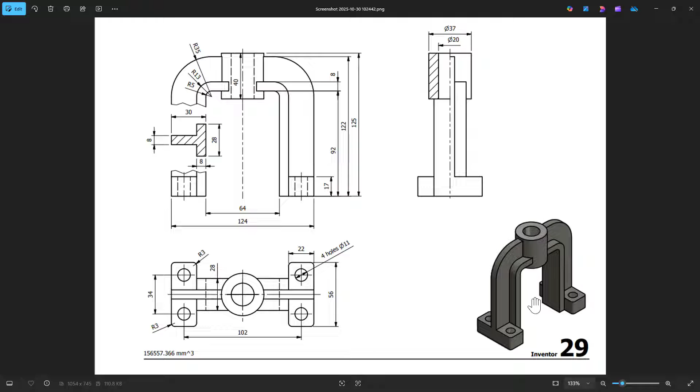Looking at this model here, it's a very simple model using some extrude bases, some cylinder cuts, and even being able to use a shell feature that we have, and then we'll be able to mirror over some of the parts as well. So we'll get started.

So looking at this model, we'll be in millimeters. Make sure we double check that we're in millimeters. We will move to the shapes. We'll pull out an extrude block. We'll go to the front face and bring this out to be 124 millimeters. The total height will be 122 millimeters.

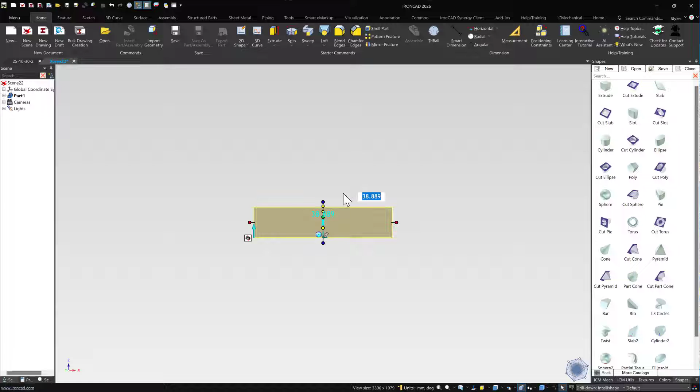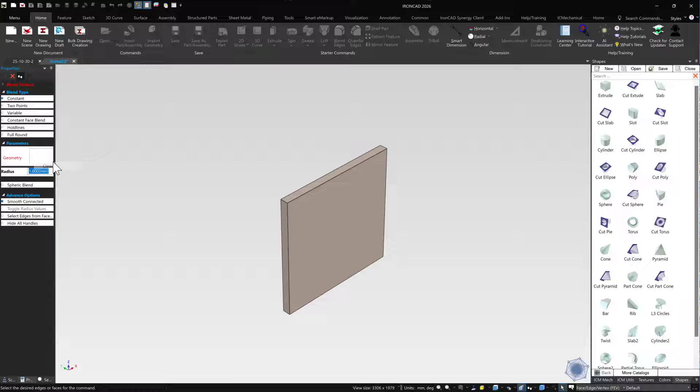Looking at the thickness for this middle part, the middle part will have a thickness of 8 millimeters. We'll go to blend, and blend the corners. Clear. We'll blend these corners here. These will have a radius of 35. Go to this radius here. Click OK. So this will give us the middle shape.

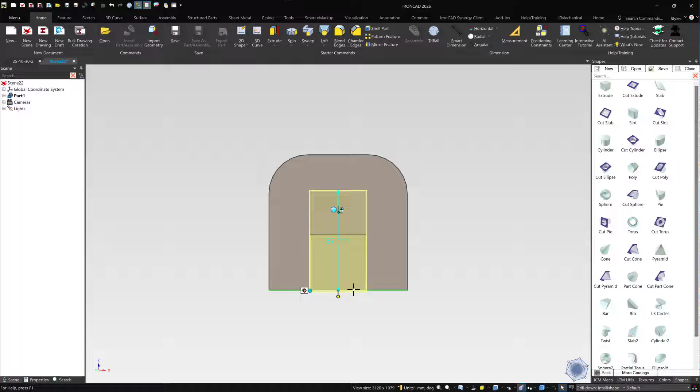Next, we'll go back to add another extrude base, one here in the middle. We'll bring this down to the bottom. We'll have this go to the right side. Bring this out here, bring this out here. We'll just remove perspective view.

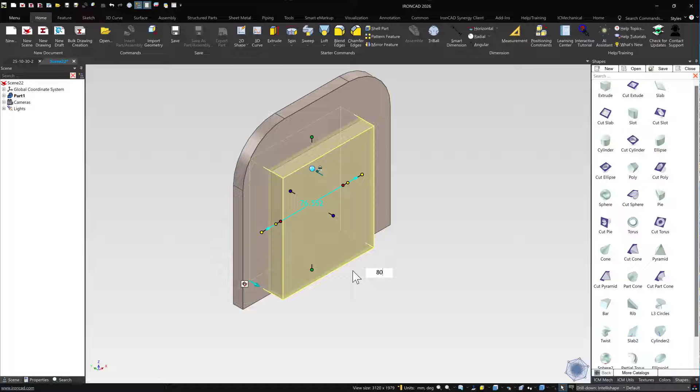Then what we'll do is bring this out to the total thickness. This has a total thickness of 28. We'll bring it out to the thickness of this side. So this has a total thickness of 64, but a thickness of 8 on each side, so this 64 being the middle. So this will have a total width of 80.

And the total height of this, so the total height at the bottom of the shell, if we were to bring this back, at the bottom of the shell is 92, but with the thickness this has a total of 100. So we'll bring this up to 100. Let's do it like this. 100. We'll go back to the blend.

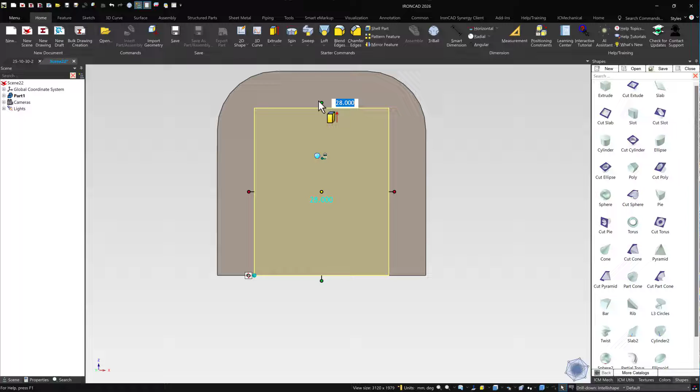And we'll blend this section here. This has a total thickness of 13 on the outside. 13 here, 13 there, here, and here. So we'll add this, 13, click OK. So we now have this section here.

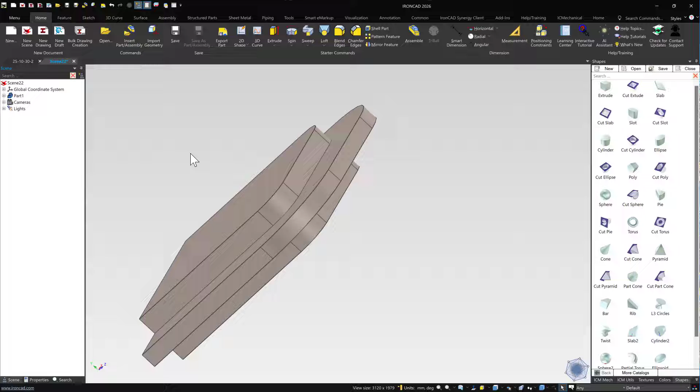So what we'll do now is go to shell part, click on this surface, and we'll choose the bottom surface as well. This is a thickness of 8 millimeters. Let's put 8 millimeters, click OK, which will give us this section here.

Next, what we'll do is we'll add an extrude block down to this section. We'll make sure that it comes up to here, that it comes up to here as well. This has a total height of 17, so we'll bring this down to 17.

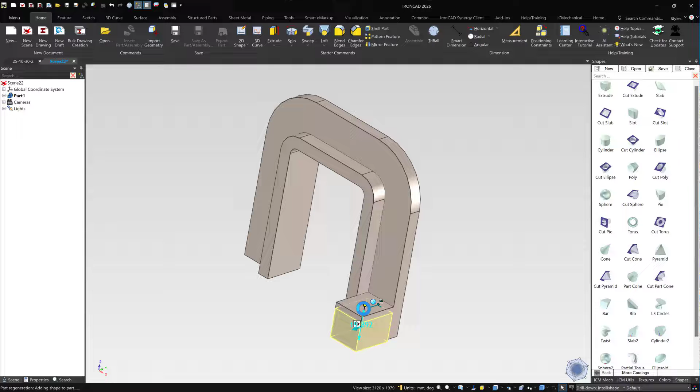And this has a total thickness, width. Let's do from here, let's even it out so we can do from both sides. This is a total width of 56, so we'll make this 56. And it goes from this face to this face here.

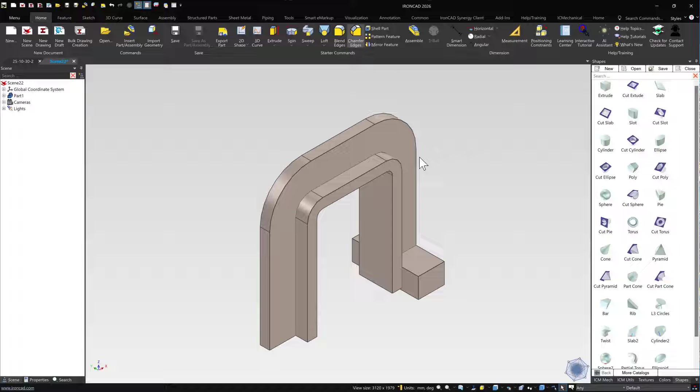Next, what we'll do is we'll add the cut cylinders. So we'll go to the top view, add the cylinder to this end. This cylinder has a total diameter of 11. And this is 34 between the two, so from the middle section is 17.

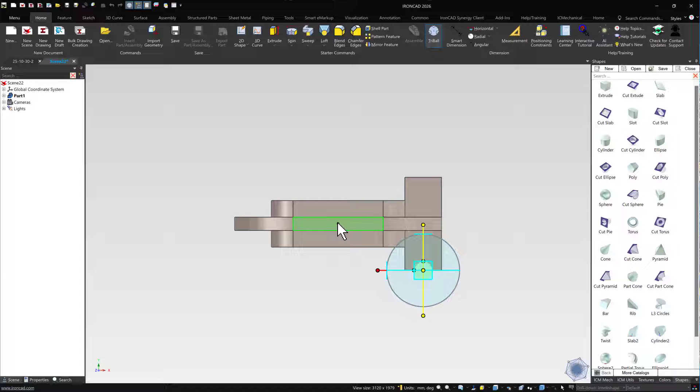So from here, let's do from distance point. Let's do it from at a distance point from this middle point. It'll be 17. There we go.

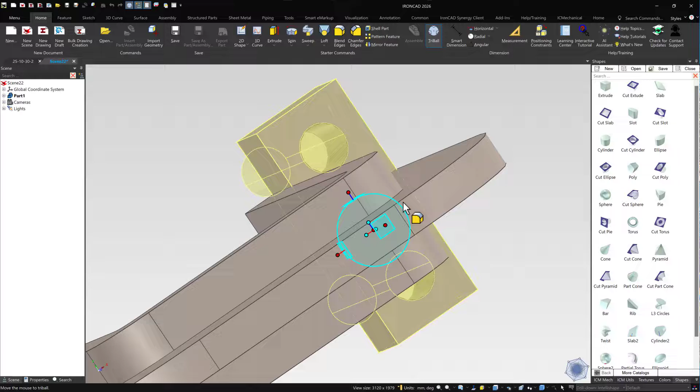So we'll open the TriBall once again. We'll right click, drag to be linked to a total of 34. There we go. What we can do now is select this part and these two holes. We'll open up the TriBall, go to the top view, and bring this to the middle. Yes, to the middle here. And we will mirror, we'll link it. There we are.

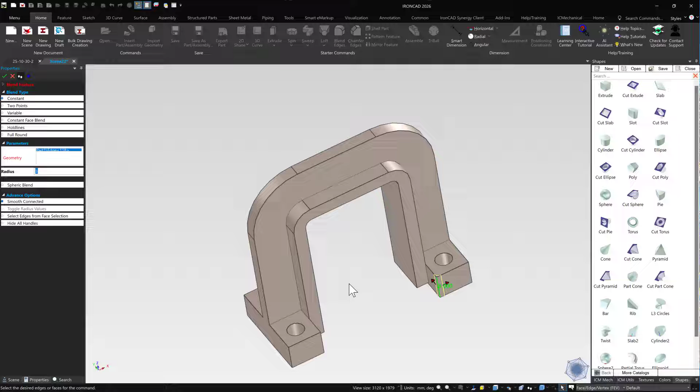Next, we'll go to blend and blend these corners here. This corner has a radius of 3 and it's all the way around. So we'll choose this corner, this one, here, here, here, and here. We'll click OK.

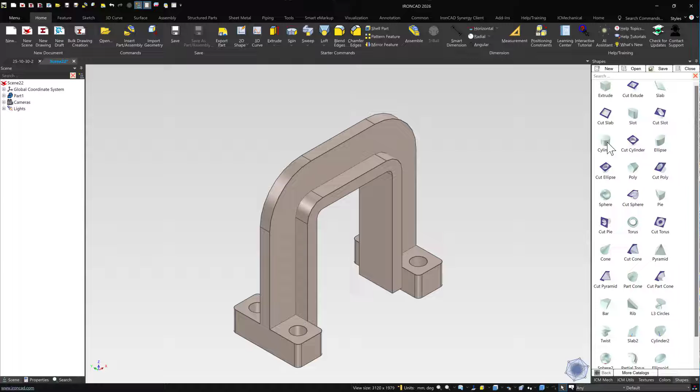Lastly, we'll add the top cylinder on this top face here. So let's go back to isometric view. We'll add the cylinder here. We'll bring this down to this face. We'll make it even as well from this section, just to give us a reference.

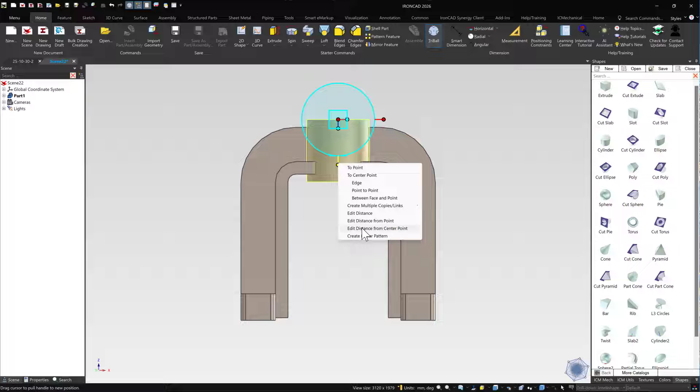Bring this down to this section here. Go back to the front face. So this has a total length of 40, so we'll move to be 40. However, if we open the TriBall, bring this to this top section, this has from this top face to this edge a total distance of 3 millimeters. So this will move down.

And then lastly, we'll cut the cut cylinder here, which has a total diameter of 20, which we can hold there. I'm sorry, this diameter of this cylinder is not 40, but it's 37. There we go.

And here is the part. Go to the properties, click on it as 7800. Let's change this to grams.